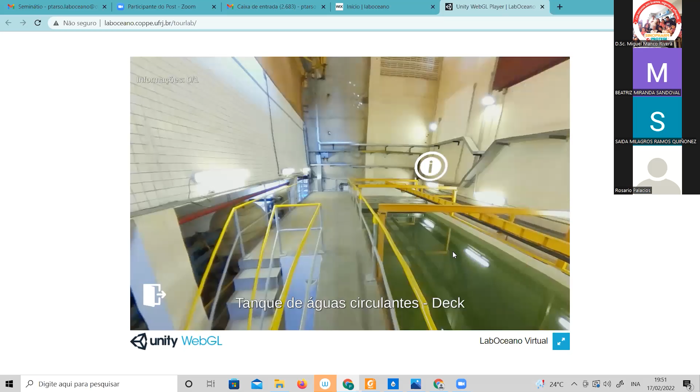So, let's go in. Então, aqui nós começamos a entrada do laboratório. A gente vai seguir essas setas aqui, we're going to follow these arrows, okay? Esse aqui é um laboratório menor, small lab. It's part of LabOceano, but it's a small one.

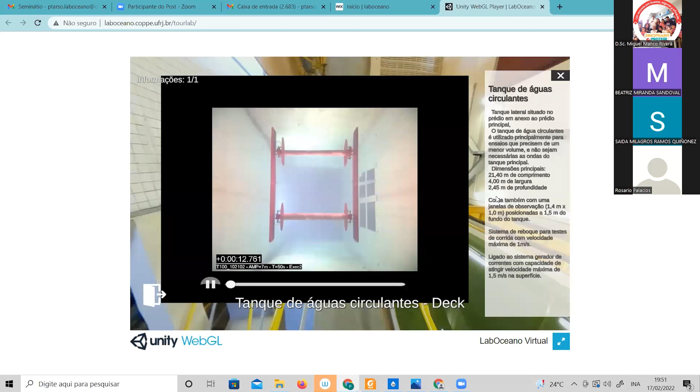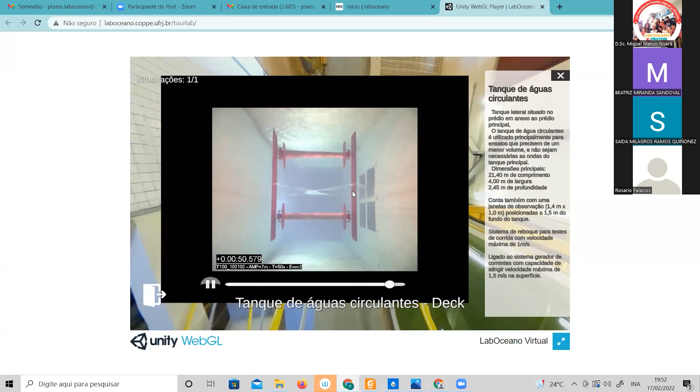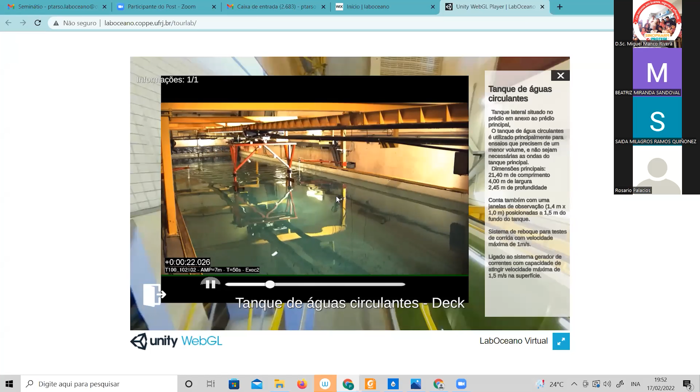So we can see here a video showing this experimental test. Here we have a monorail moving, oscillating the cylinder. Here you have a cylinder. This kind of test we perform to get hydrodynamic coefficients, drag coefficients, and inertia coefficients. So you can see the cylinder. In fact, this double image is just a reflection of the free surface. You just have one cylinder, not two. The other is a mirror effect.

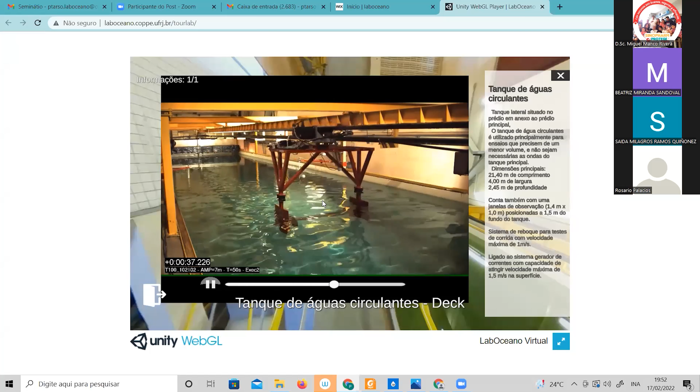So you can move up in both directions and get the forces. You install two load cells here, then you can measure the forces. Then you can identify the drag and the inertia coefficients, following the Morison equation, okay?

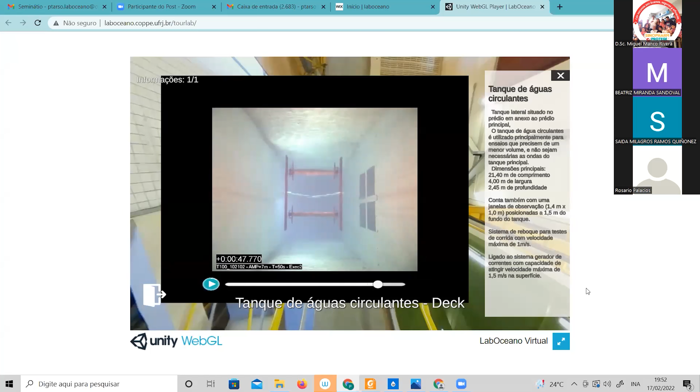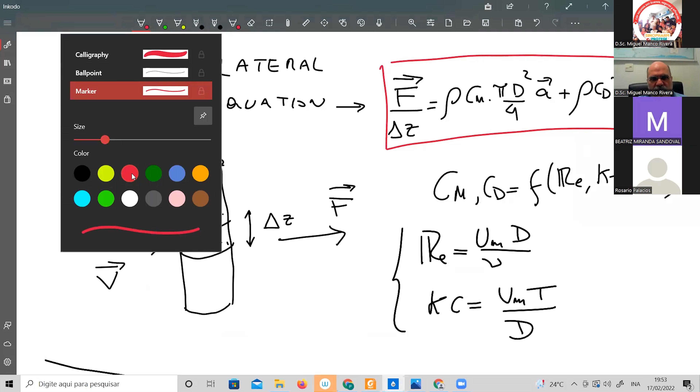I don't know if everybody is familiar, but when you have a small, slender body like a riser or a cable, usually we use the Morison equation, this equation here. Then you have to calculate these coefficients, inertia coefficients and drag coefficients. These coefficients depend on three parameters: Reynolds number, Keulegan-Carpenter number, and rugosity.

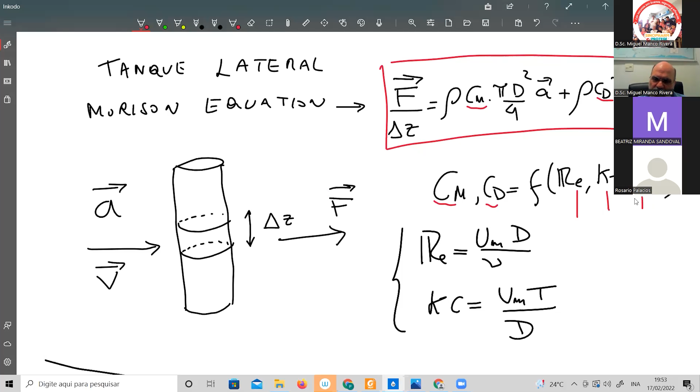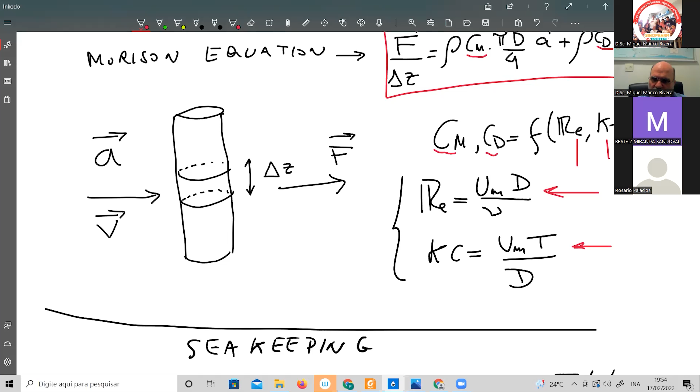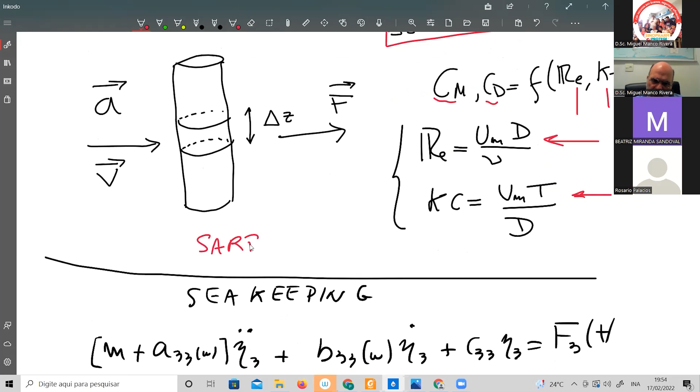Agora, em português: aquele tipo de experimento é para obter esses coeficientes de inércia e de arrasto, que dependem de 3 parâmetros adimensionais. O número de Reynolds, diretamente associado às forças viscosas; o número de Keulegan-Carpenter, associado ao escoamento oscilatório; e, finalmente, a rugosidade relativa, que é um parâmetro importante. Esses experimentos foram primeiramente realizados por um pesquisador chamado Sarpkaya. Então, a ideia daquele experimento é fazer variação desses parâmetros e conseguir obter diferentes coeficientes.

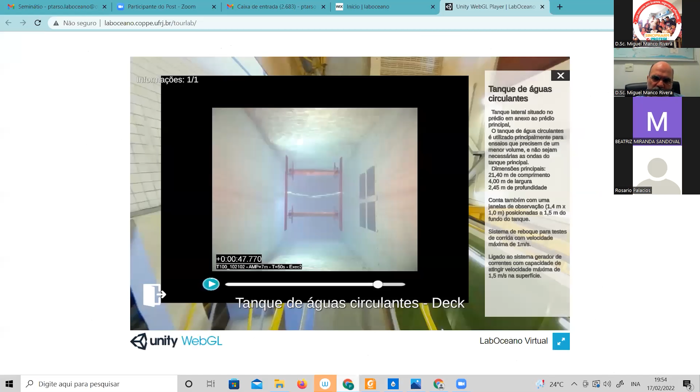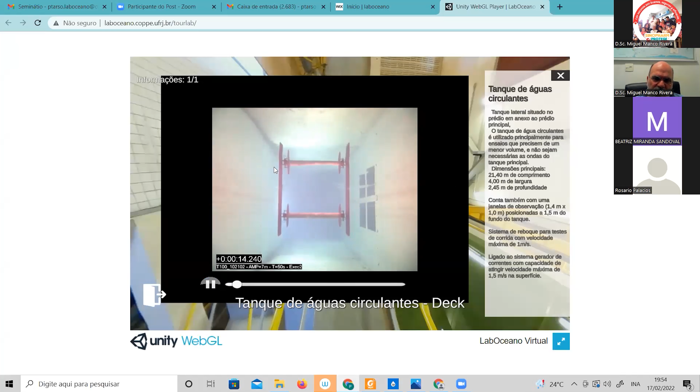We call this facility a water circulation channel, because besides this motion, we can have here a current system. We can just move this water. Not in this case, but it's possible to move the water like a river. That's why we call it the circulating water channel.

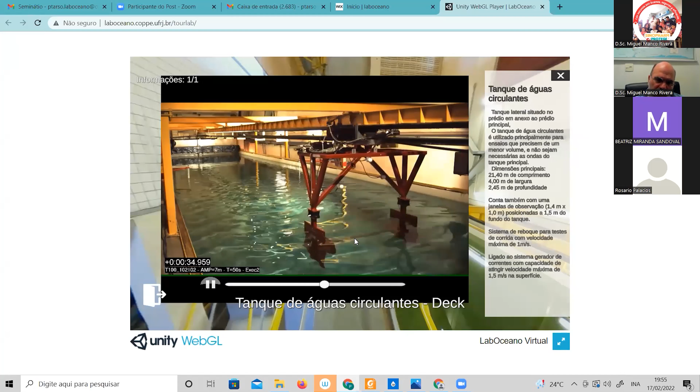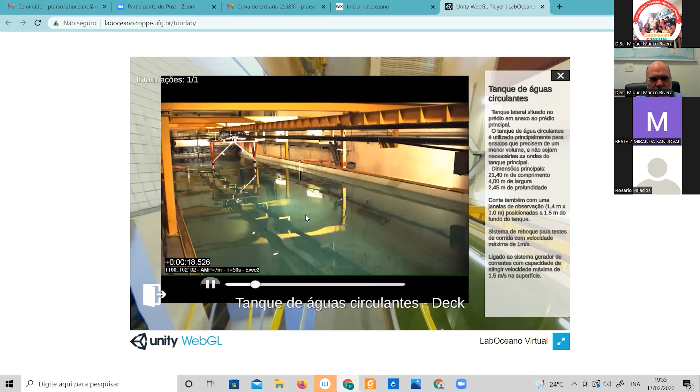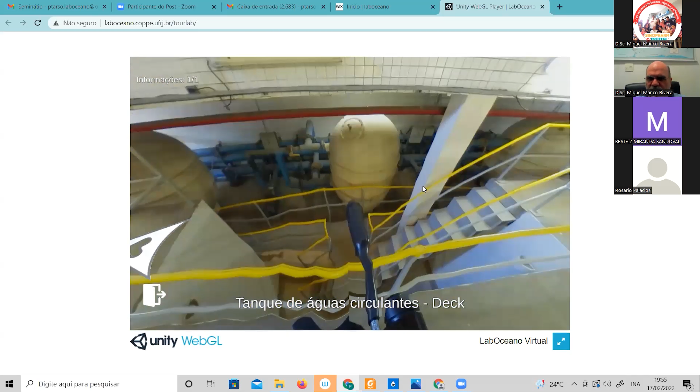Ou seja, essa mesma facilidade a gente pode, ligando o sistema de correnteza, fazer com que por aqui passe uma corrente uniforme, e aí você simula a situação da correnteza. Nesse experimento, nós não estamos usando o sistema de correnteza, é só o movimento do aparato. Essas estruturas aqui são os filtros de areia, como uma piscina, para você limpar a água, toda uma tubulação para limpar a água. These are the sand filters to clean the water of the main tank, similar to a swimming pool.

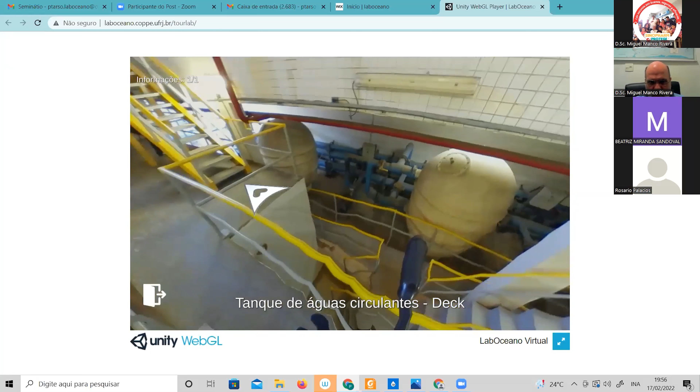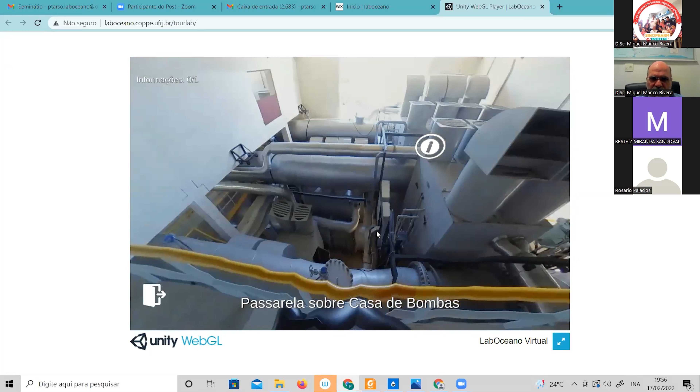Now we are inside a new building where we have all the machines of the current system. This is a house pump machine. To move the water, you need big propellers or big pumps and big motors. So inside this box here, you have one diesel motor, Caterpillar. The power is 1,000 horsepower, very powerful. In this building, we have 6 of these motors. To move all the water of the tank and generate currents, we need to start all these 6 motors.

Então, esse edifício é um outro prédio que fica ao lado, onde ficam todos os equipamentos que vão movimentar a água do sistema de correnteza. São 6 motores diesel Caterpillar, de 1000 HP de potência, e 6 bombas axiais. De fato, são 6 bow thrusters, propulsores de passo controlável, fabricados pela Rolls-Royce, atualmente Kongsberg.

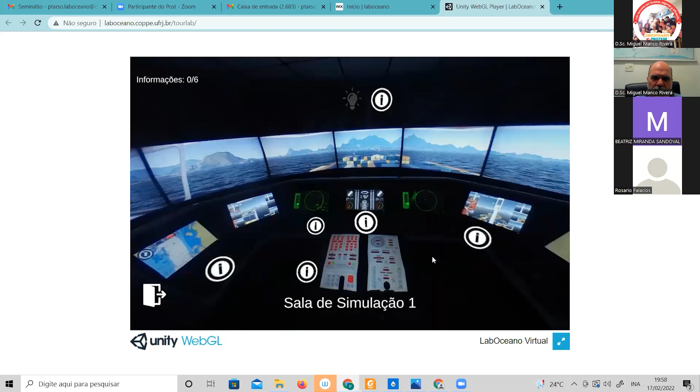Here we have another facility, but in this case it's not an experimental one. It's a simulation, a virtual simulator for maneuvering. We have 3 rooms. You have the screens simulating the condition of the captain of the ship during a maneuvering operation. This is one of our employees, just moving the controls of the ship to simulate the maneuvering. It's a virtual simulator, completely developed inside LabOceano. It's not a commercial one. Everything was developed there, but the hardware, of course. All the software was developed in LabOceano.

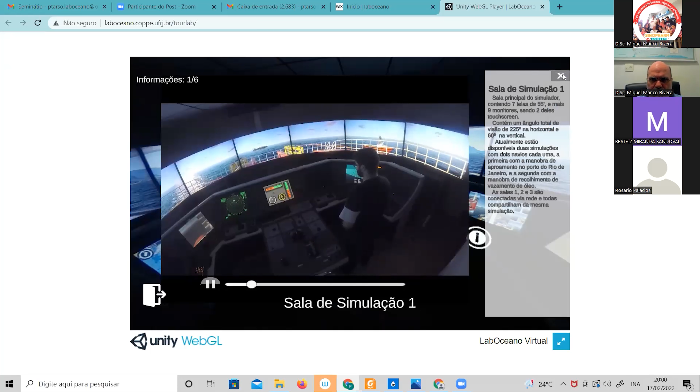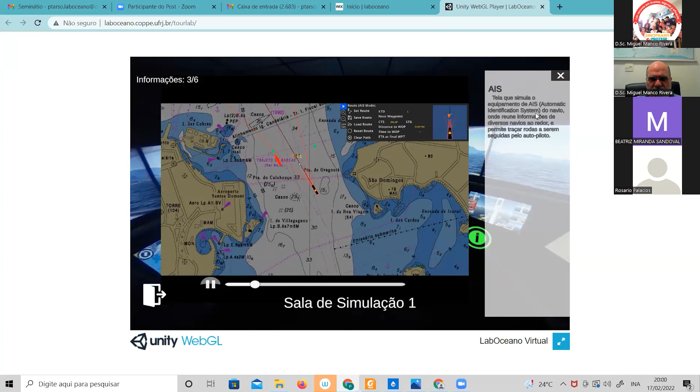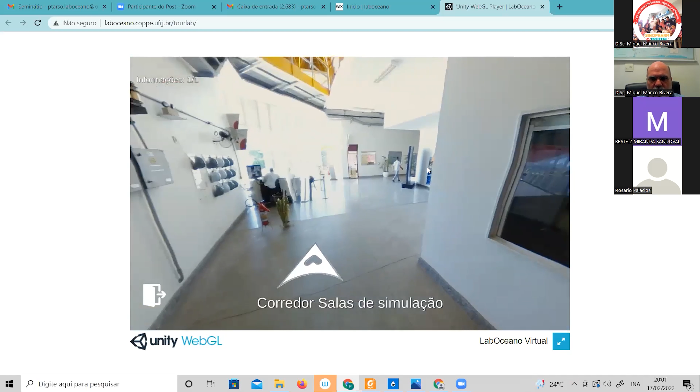For example, here you have the cameras in different points of the ship. Here you have the AIS, Automatic Identification System, which is quite useful for the captain. Here's all the controls of the captain in terms of velocity, rudder angle, etc. That is the touch screen controller, touch panels, and this is the radar. All the equipment that you need to have in the captain's cabin. Okay, let's move.

Now we are going to, well, back now. I still have to learn this. Okay.

Well, these small ships are tugboats for a student group competition in Brazil. They call it Duna, and every year, before COVID, they go to the south state in Brazil, Santa Catarina, and participate with other groups from different universities in a competition of tugboats. So they are developed by the students.

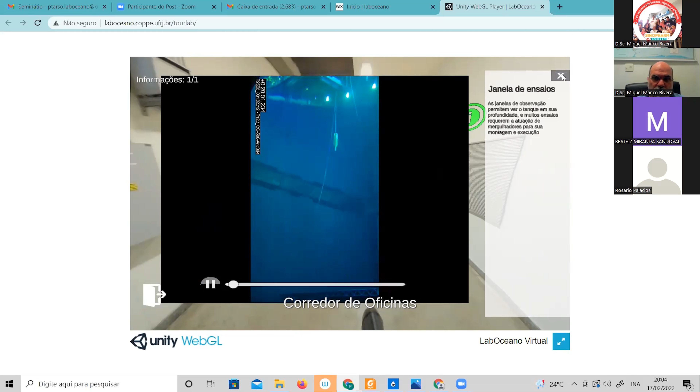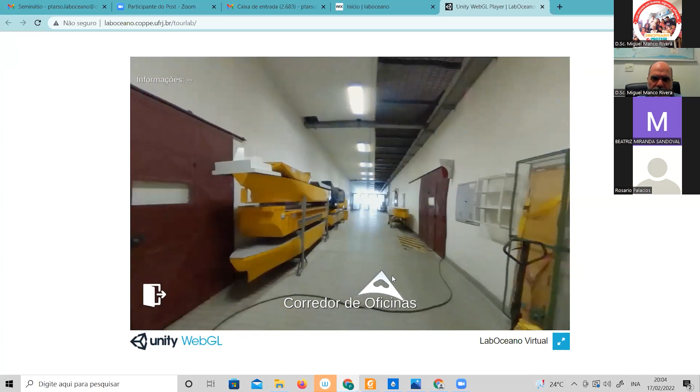Muito bem. Foi. Acho que eu esqueci alguma coisa. Já foi? É.

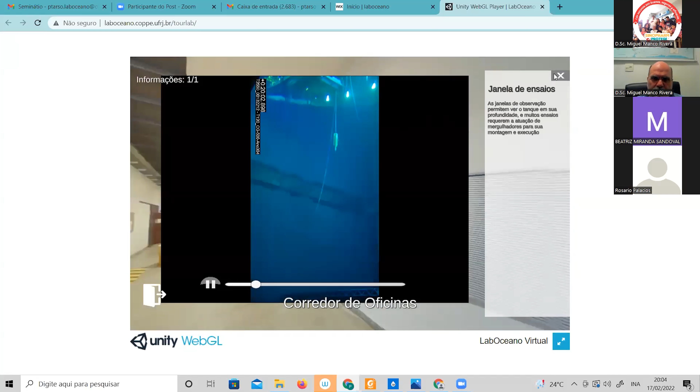Let's move on. Vamos em frente.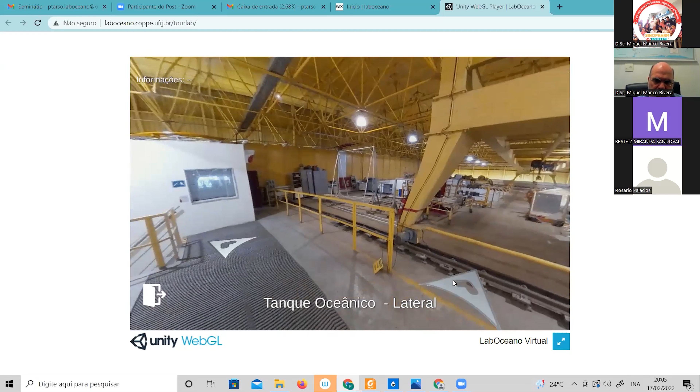Esse aqui é um pequeno tanque auxiliar, onde fazemos alguns testes de estanqueidade. This is a small tank just to perform some initial, preliminary tests of watertightness of the model.

Here you see a small ship, a supply boat. In this case, this is a dynamic position test. You can see here the bubbles, because here you have a bow thruster. You can maintain the position of this boat without using any mooring system.

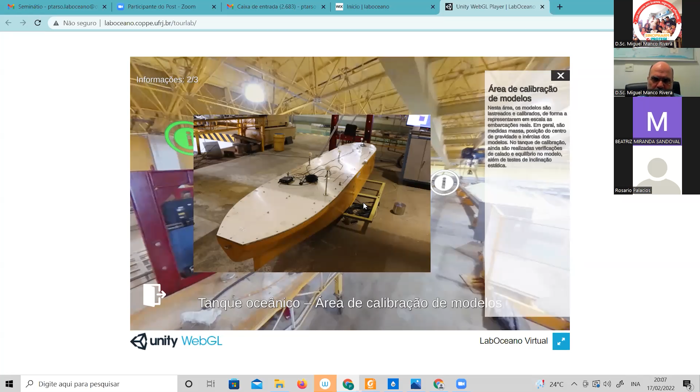Muito bem. Uma outra.

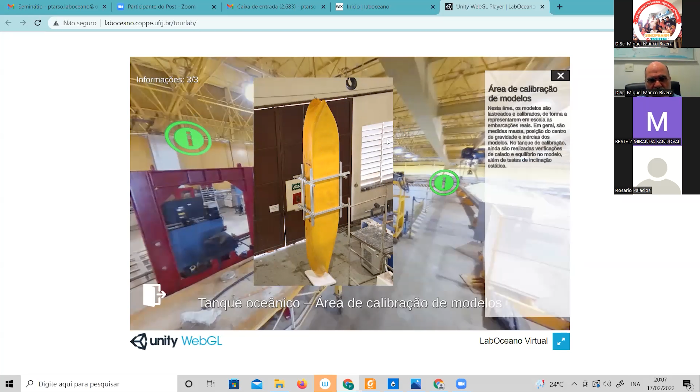This is a calibration to get the information, the inertia properties of the model. They are very important to the dynamic of the rotation of the ship or the platform.

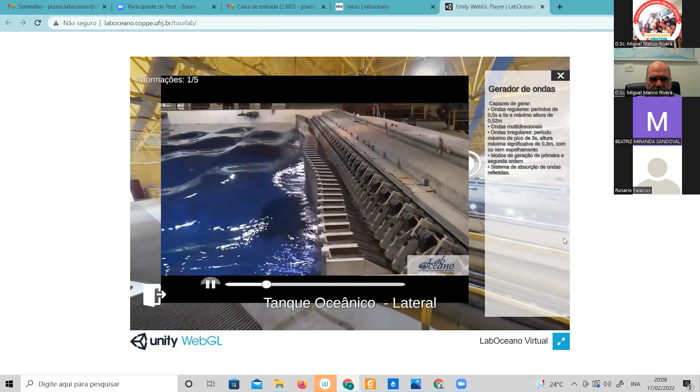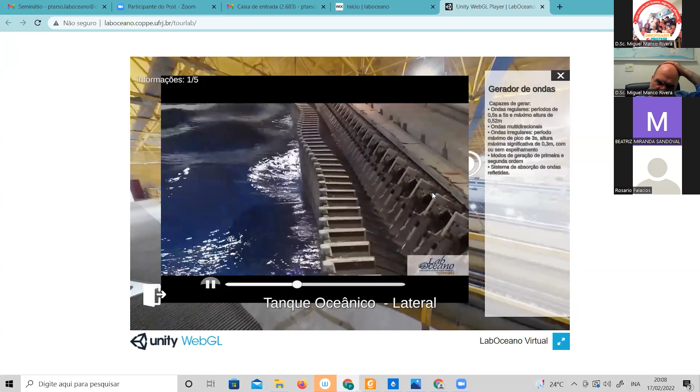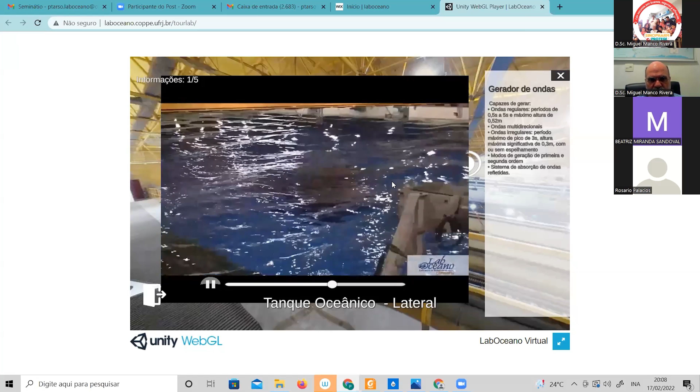So this is the wave generator, the main equipment of the lab, and it can generate waves parallel or directional waves. So that is the main equipment in terms of wave generation, okay?

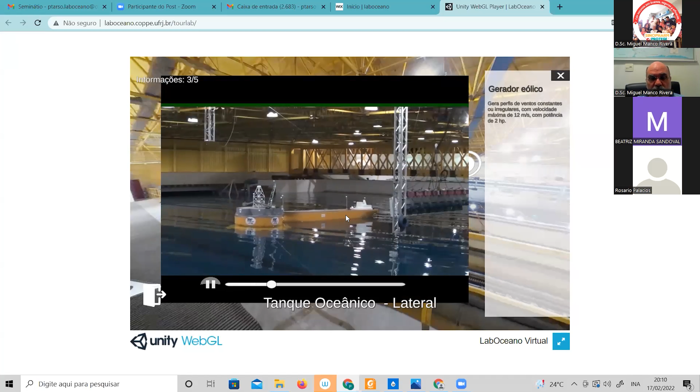So this is an offloading model testing. We have 2 ships here. In this case, they are controlled like a dynamic position system. They are not moored, and then you have the wind and the waves, and you can simulate the offloading operation. It's an interesting model testing.

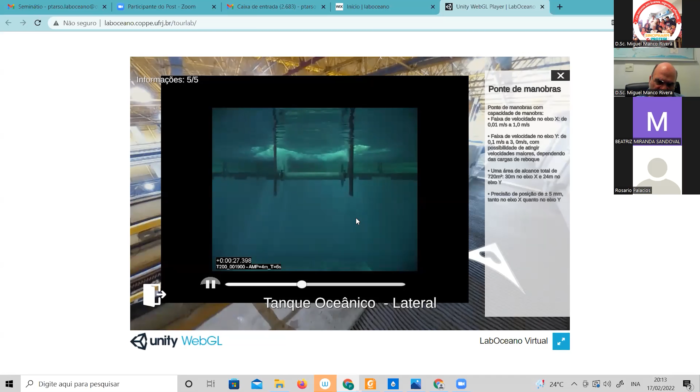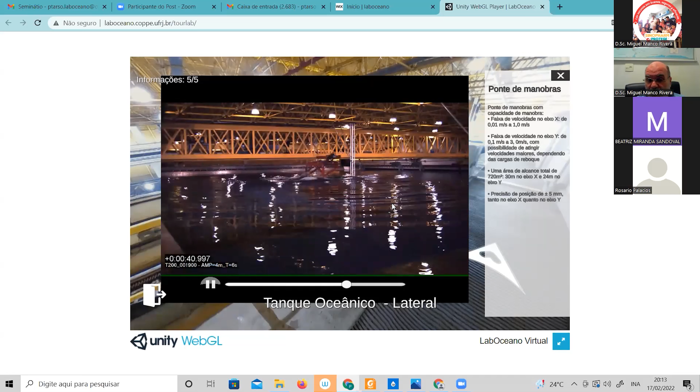So this is a similar model test to get the Morison coefficients, drag coefficients and inertia coefficients. Changing here the parameters of Reynolds number, Keulegan-Carpenter number. The roughness we maintain constant.

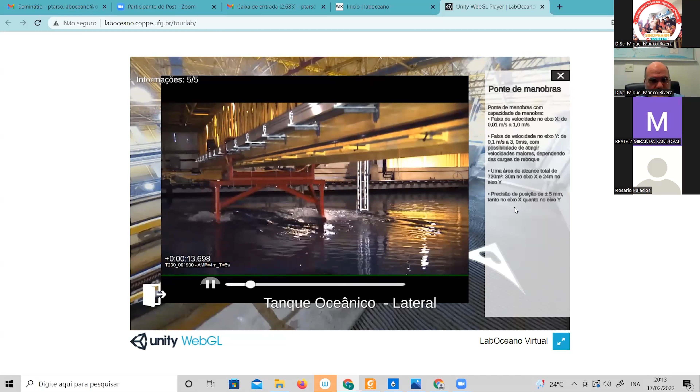Seguindo. Miguel, se eu estiver muito atrasado, me avisa.

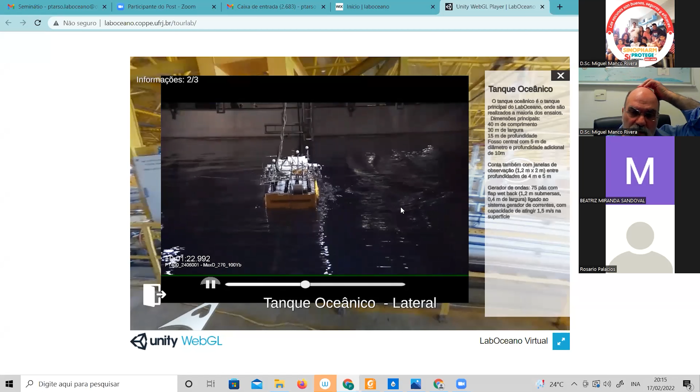This is a model test we call the green water model test, because we want to analyze the deck wetness on the deck. This is a type of test for FPSOs where you study if there is water shipping onto the deck. Notice that on the deck there are many processing equipment.

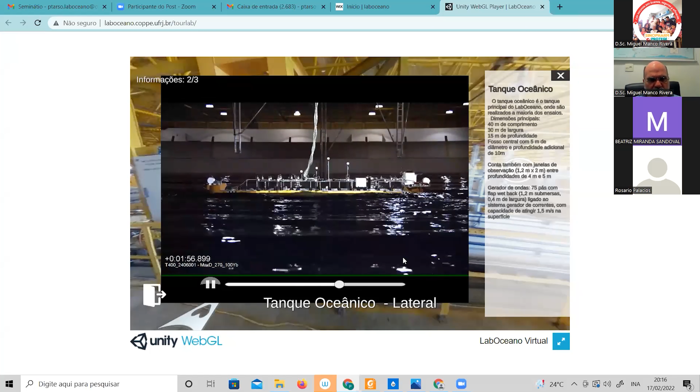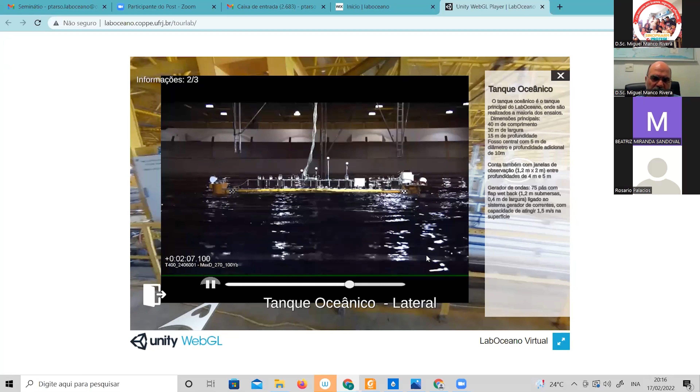So we get a lot of green water in this model test here. You are looking close. These are the wave probes to measure the amount of water that goes on top of the deck. That's important because you can destroy a lot of equipment in the real FPSO, so we need to avoid this kind of green water problem.

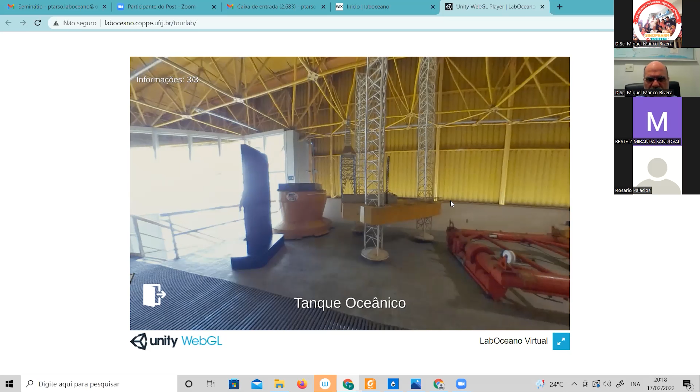These are different models: a semi-submersible, a subsurface buoy, a jack-up, and a monocolumn.

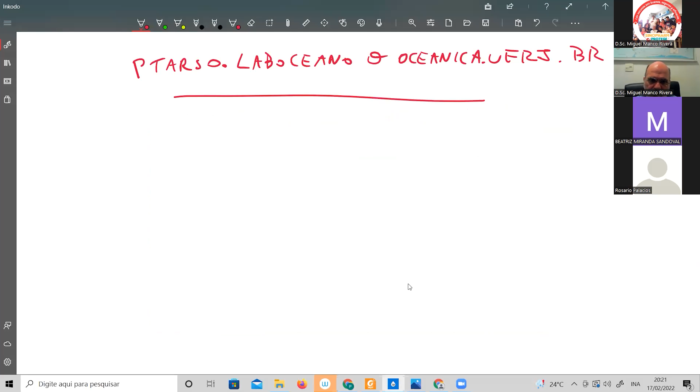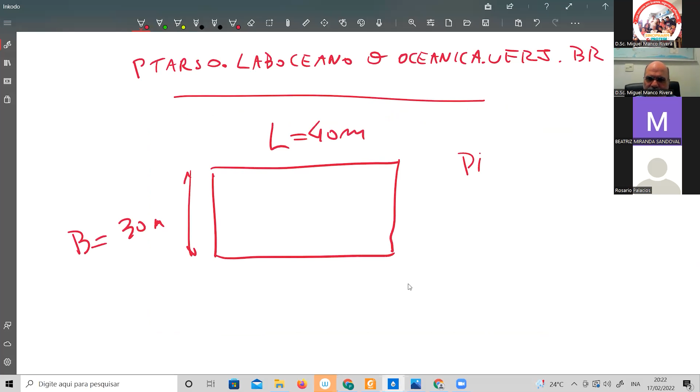Mais os 10 metros auxiliares, que são no centro. Isso, eu vou completar a informação. 30 metros, como se fosse um navio aqui, a boca. A profundidade, 15 metros, mais 10 metros no centro.

Era o tanque mais profundo do mundo até os chineses fazerem um. Ele é o segundo tanque em profundidade do mundo, por conta da questão da exploração de petróleo em águas profundas.